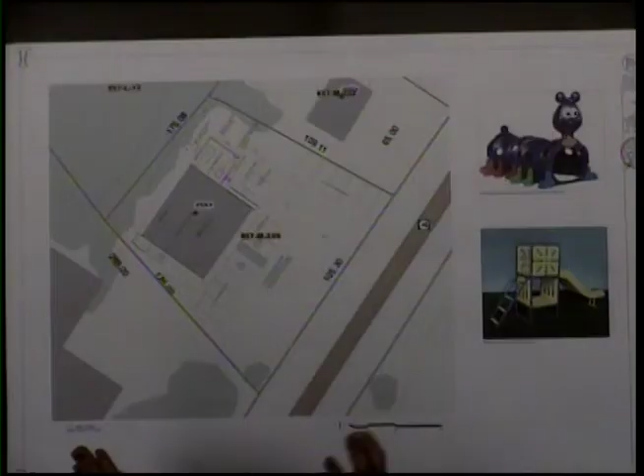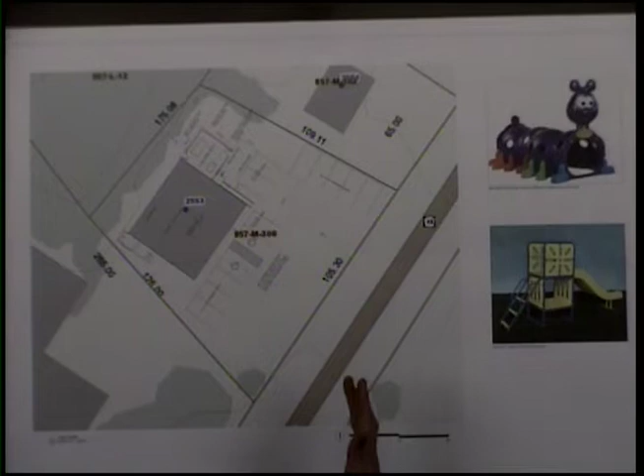So the proposal is to convert the existing dance studio into a daycare center. The daycare center is intended to have under 100 kids at any time. We believe there is enough parking on site. The only exterior changes involving the site are restriping the parking lot, patching and repairing it as necessary, adding the accessible parking spaces required, and adding an accessible ramp leading to the basement level and a playground tucked in towards the back of the site.

Is daycare going to occupy the entire building? It is, yes. And that's what, 2 floors plus the basement then? It's actually a split level, so it's a basement and then an upper floor. Okay. Any questions from planning?

So there's 6 meters there, 3 electric and 3 gas, indicating there's 3 units in there. You're going to take over all 3 and have just 1 electric and 1 gas meter? That is correct, yes.

So when you drive up to it, there's a first floor and a second floor. There's no basement? No, we were calling it a basement level because it is below grade, but in fact there's just 2 floors, so it's a lower level and an upper level. Yeah, it's a hillside. You'll use both? Correct, both levels actually.

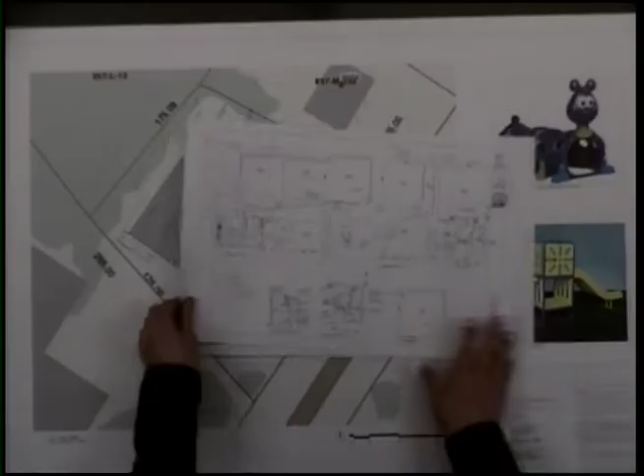I did bring the floor plans if anybody would like to see them. These have already been through plan review and been approved, and they've already been through Allegheny County Plumbing also. I'm not sure if it's better if I do it here and you can see it on the monitor, or if you'd like me to pass them around. But this will be basically difficult - I can talk through them a little bit. So the cover sheet just lists the building code information.

The first page in the drawing set shows that when you walk in the front door, essentially you come in, and again it's a split level, so you would either go up the stairs to the upper level or down to the lower level. And if you go down, we're going to have a registration area there, which leads to basically the primary childcare spaces.

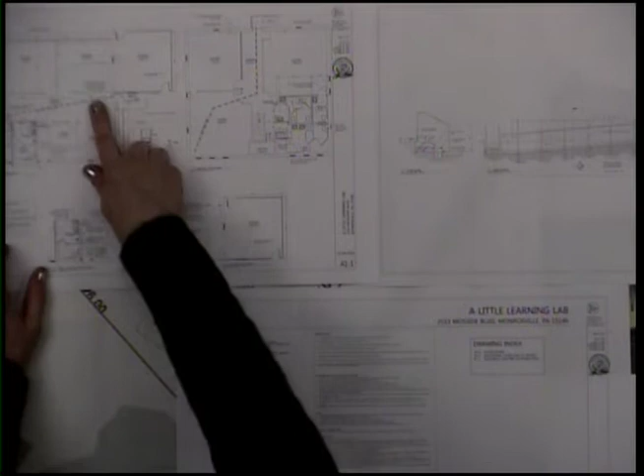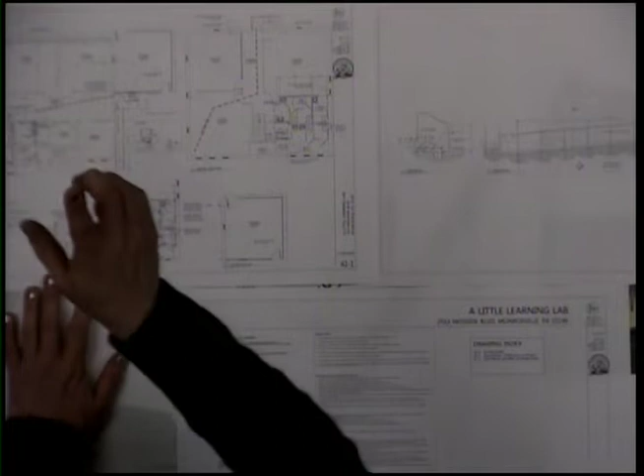So it's a large childcare area for the children through age 5, and then there's an infant space off to the side that's separated with a full height wall. There's also a restroom and then a kitchen on this level, and drinking fountains and an office. Then if you go up to the upper level, that floor has a classroom for older kids for after-school programs and summer programs, and an arts and crafts room and a game room for those kids, along with more bathroom space, and the mechanical and electrical room.

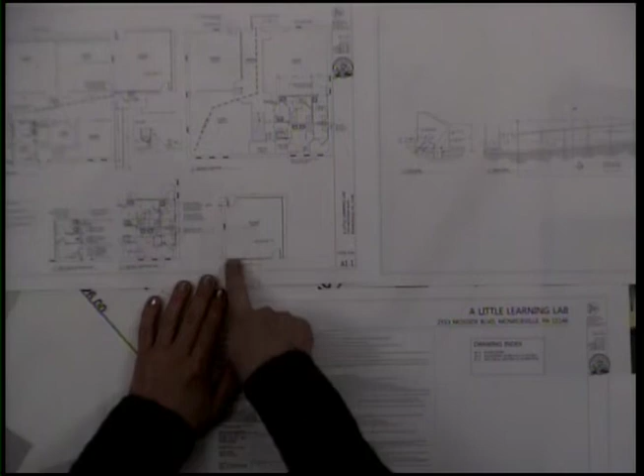And then this is just a blow-up of that playground. It's just a fenced-in area where we'd like to install some play structures, and what they were looking at was smaller children's play structures, so something like this tunnel and something like this slide. We haven't finalized anything, but something in this general idea.

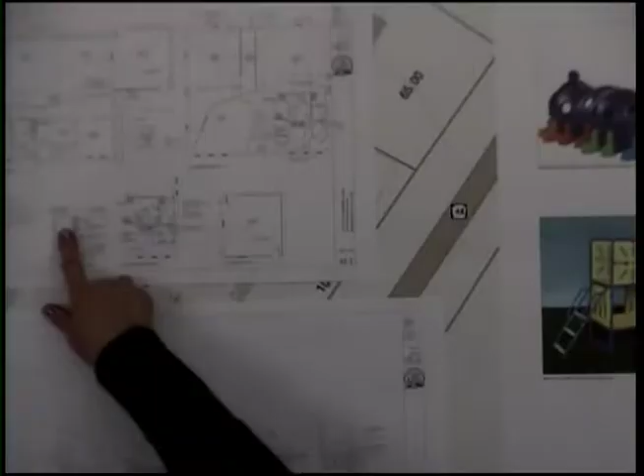And then these are enlarged restroom plans. And then again, we did want to add an exterior ramp to be able to get to the basement level. So these are just drawings showing that ramp.

Are there residential neighbors on either side? No, it's actually commercial. I believe it's a heating and cooling company on one side, and I can't remember who's on the other side. They know that there's gonna be a daycare there, I believe so, yes.

Do they have to be notified? Yes, there was public notice posted, letters went out. Did anybody respond? Nothing.

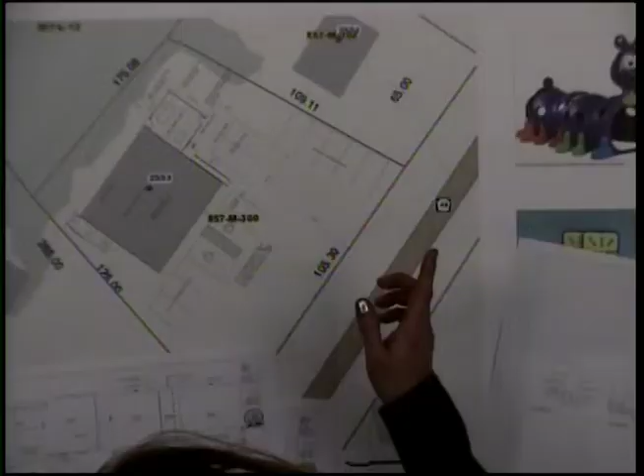You mentioned you believe there's enough parking spaces. How many are there? We had 10 spaces, plus the 11 spaces, plus the 2 handicapped accessible spaces, one of which is actually a van space required by code. And there's 100 kids.

Is there space for cars to get by each other and turn around? It looks pretty crowded. The way we broke down the code, the total number of occupants for the building is 71, which includes the staff. The intention is to have probably more like 75 kids at most, plus the staff. We only did a code summary for 71, but when you look at how the plumbing fixtures break down, we wouldn't be allowed to reach 100. I meant that we had capacity for up to 100, but in actuality it's more like 75 at most.

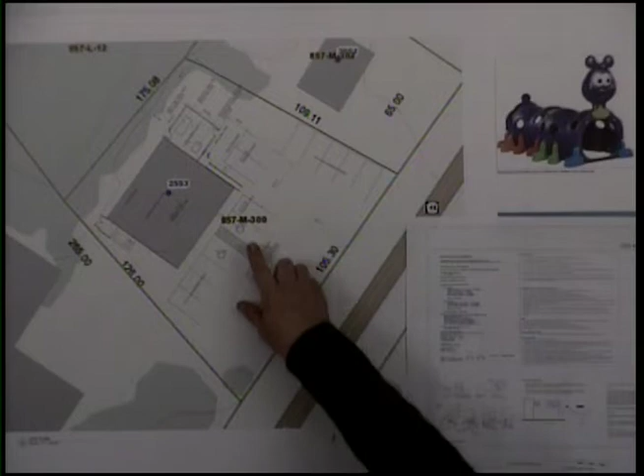For the parking, what we have between the parking spaces and the property line is 36 feet. That should be enough space for two-way traffic and for people to back out of those spaces. They're really intended more for parent drop-off. For staff, we'd have some staff needing parking, but these spaces are more meant for picking up and dropping off kids.

So where would the staff park? If you have 75 kids, you have a lot of staff then. We have up to 12 staff members, but that's based on plumbing code requirements, not on what their anticipated staff loading is. Their anticipated staff loading was 6, but we had to follow the plumbing code requirements.

So that's half the parking spaces. It is half the parking spaces. But again, the presumption is that parents would drop off and pick up, they wouldn't be parking there all day. Yeah, but usually there's a rush in the morning and a rush in the evening to drop off and pick up your kids, and most places I've seen, the parents walk the children in to make sure they're acknowledged. They can't just stop. Yeah, no, I'm sure that's true.

That seems quite congested, or could be quite congested. Paul, does that fit within our zoning requirements for parking for a daycare center? I'll have to verify that with the number. I didn't look at it with up to 100 students, or pupils, whatever you call the children, and then the number of staff. So we can review that further. Why don't we review that, yeah.